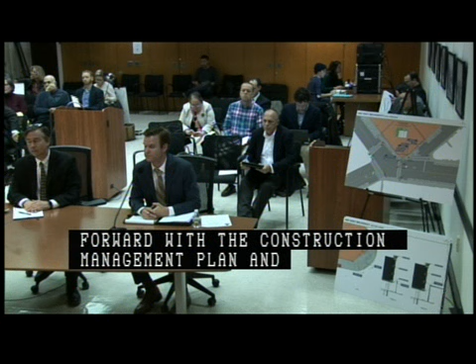If I can, I was present as well, and I would concur.

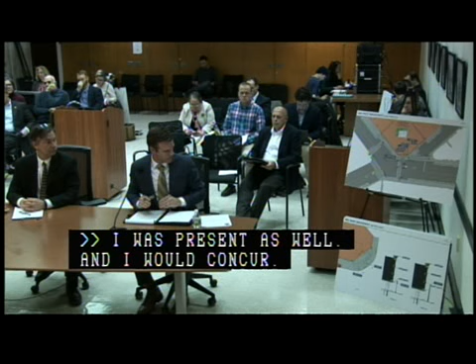You can go through the vertical discontinuances, the first item on the agenda. Yep, so we have the vertical discontinuance is we have a roof cornice, we have the building facade, and we also have some entrance canopy that will be overhanging the property.

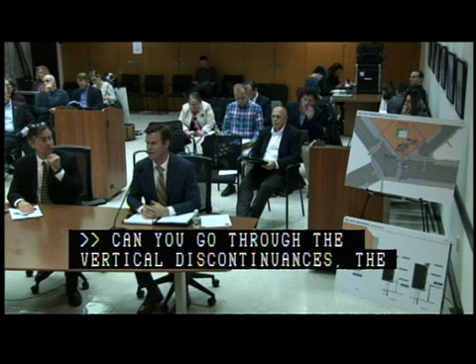The building facade, which I have a section of. So the roof cornice is really what overhangs the property the furthest. The building facade, the concern with that mast arm location, so the surveyed mast arm, we're about 5.5 feet from that pole. And then the entrance canopy at the corner, the furthest extension of the building will be still 5.5 feet from the closest point to the mast arm of the traffic signal. Is that right? Right.

Okay, sorry, keep going. So the roof cornice, that'll wrap around the entire building, but the building facade overhang is really just at the corner where it rounds around, where the property line is more of a tangent.

Sarah, located the pinch point? Because what is not clear is the proximity of the pole, the handicap ramp, and access. So where the building gets that close is not at sidewalk level, it's second floor level. The building starts overhanging, correct, yeah. So the entrance is set much further back, actually behind the property line.

This plan view here, so here's the building at the ground level. On that plan, where is the traffic signal mast arm? The traffic signal is right here. And your ramps are? The ramp is at the transition point of the ramp. So you have to put a pole.

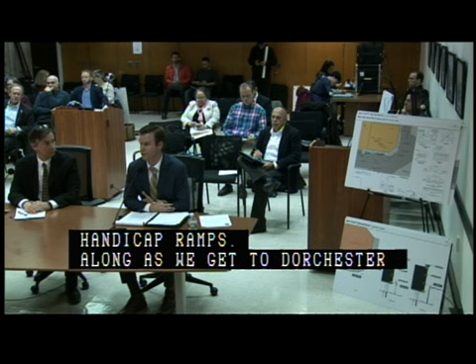So for the specific repairs, we're proposing to reconstruct the sidewalks around the perimeter of the property, the development. Starting on West Broadway, we'll have 2 proposed trees within some pervious paving. We'll have reconstructing 2 handicap ramps, and also as we get to Dorchester Street, we'll be modifying the existing curb cut to align with the garage entry of the new building.

I'm sure this came up in the conversation with BTD, but can you just walk us through how you envision the driveway operation working and how that will conflict with moves on Dorchester Street?

I'll let Guy Busa talk. Guy Busa, Howard Stein Hudson. Now, I was not at that particular meeting, but Doug and Jay can correct me if I'm wrong, but that driveway is serving 21 parking spaces. It's an alternating flow driveway. Because it's residential, it's very limited traffic. So what was discussed at the meeting with BTD was some modifications to some curb use, in particular a parking spot that's towards the intersection from the site.

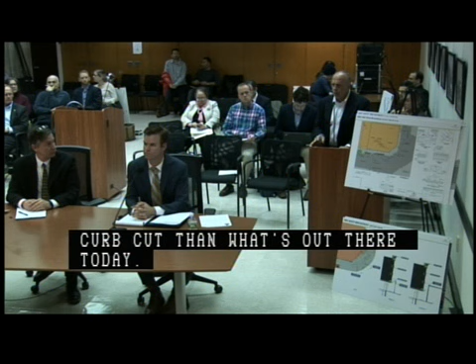And possibly some other changes along Dorchester Street to improve operations, particularly in the PM peak hour. Better than what's today, actually. That driveway is also a smaller curb cut than what's out there today. I believe there are 6 parking spaces, is that correct? On a 24-foot, 22-foot curb cut.

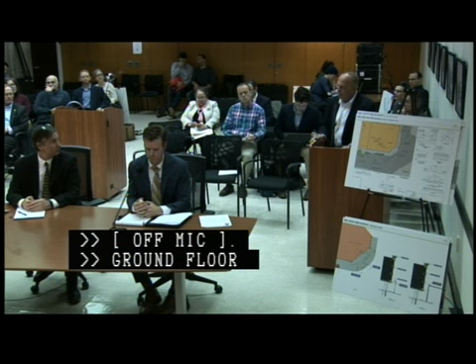BTD was comfortable with this solution. So the intent is to continue working with BTD to refine that plan? Yes, correct. So any changes in curb use will end up with a signing and marking plan for that purpose. Where's the loading for the ground floor retail? Ground floor retail on this type of property would be curbside, as they are along West Broadway. There's no proposed loading zone for this property. It's a small project review. That was also discussed at the BTD meeting.

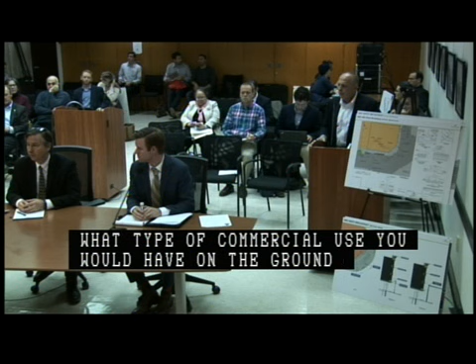Amy, do you have some idea as to what type of commercial use you will have on the ground floor? The use is not determined, but it's not proposed to be a restaurant. Anything that would require short-term drop-off and pick-up, whether it's a bank teller? We have no indication of retail yet. It's one generic space that could be broken up, but it's geared for retail.

We do find that local retail, which is what this is intended for, doesn't get large deliveries. It's much more of a package delivery service, like UPS, and they restock their shelves that way. They don't have any kind of back storage space or warehouse. Like a bank would be perfect. It's fairly typical of local retail.

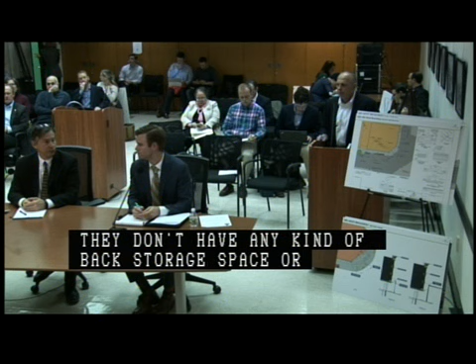I think what we're trying to avoid is a situation where people are just pulling up their cars to run in and clogging up the intersection. So if we envision a use that would dictate that type of behavior, we need to account for how to mitigate that. If that's the case, we could seek some pickup drop-off guidance from the BTD.

Be sensitive, because what Mr. Nelson is saying is, case in point recently at Upham's Corner, there's a Santander bank with a teller machine, and when cars illegally park there, it compounds the traffic circulation, and awkward things happen. We don't want that. This is a problematic Dunkin' Donuts situation. Really, we're trying to avoid repeating that. It will never be as bad as Dunkin' Donuts though.

So, how's that for an answer? Let's set the standards to where we need them to be. Yes, correct, understood. Good point, Amy.

Other questions or comments about the plan? I appreciate the addition of a defined furniture and planting zone with the pervious pavers. Broadway acts as essentially a main street feel for South Boston, and I'd like to see this type of sidewalk treatment proliferated through that main street. It clearly defines the furnishing planter zone, gives us pervious stormwater treatment, and promotes the street trees. Using this corner as a high visual impact anchor is greatly appreciated. Thank you for being responsive to that comment.

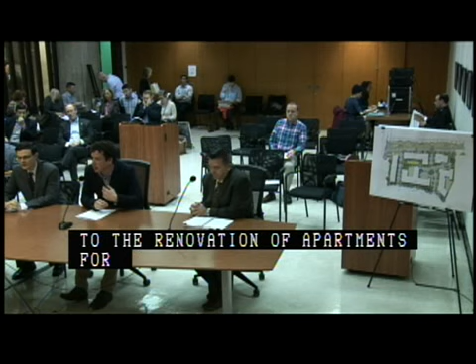The project is part of a larger master plan, of which this is the first phase. We expect to start construction before the end of this year, specifically involving renovating and improving the sidewalk in front of the existing Amory Street Apartments building. The other changes that go along with this master plan will come before the commission as part of a separate petition, and we'll be happy to talk about those in more detail then. It shouldn't affect anything regarding the approvals for this piece.

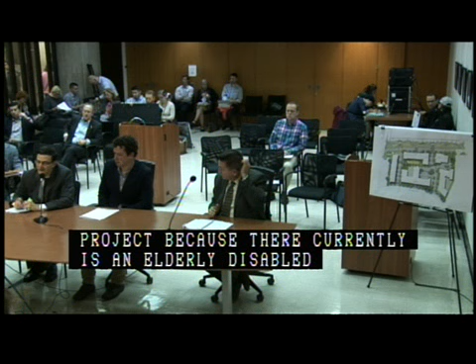I'm Dean Papadimitriou, counsel for the Boston Housing Authority, and we're very excited about this project because there currently is an elderly disabled building on the property that is in need of major renovations, and this is a way that we're going to be able to do that and maintain the existing units, but also add a few additional units as part of the project.

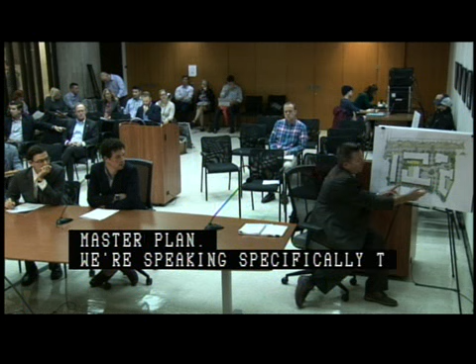Good morning, John Schmidt with Nitsch Engineering. The plan before you is the master plan, and we're speaking specifically to 125 Amory Street and the sidewalk in this area. These future private ways, as we had indicated, will be coming before you in early 2019.

Regarding the easement petition, it runs from the parcel line here to the parcel line here. It's a 5-foot wide easement, and this easement will allow for an 8-foot wide concrete accessible sidewalk, as well as a 6-foot wide pervious paver strip for a furnishing zone.

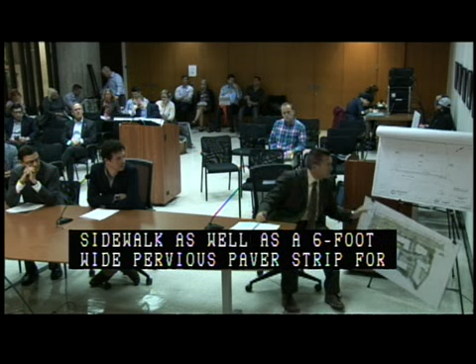It is great. We are appreciative of the fact that you are widening the sidewalk because Amory Street is challenged as it is. Are you going to carry that same vocabulary? Yes. When we come back, we're going to bring this to the limits of our property, and this to the limits of our property. So it'll be one continuous strip.

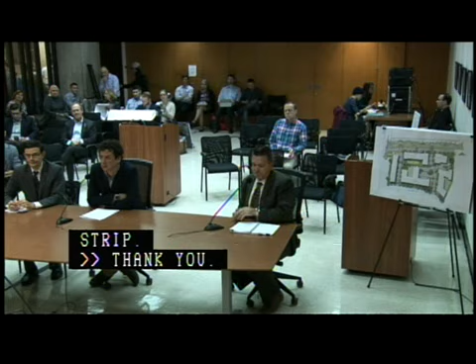Other questions about the pedestrian easement plan? Amy? Todd? Members of the public? All right, I'll entertain a motion on the pedestrian easements.

I'll make a motion to approve a joint petition by New 125 Amory Street LLC and Boston Housing Authority for the acceptance of a pedestrian easement adjacent to Amory Street, as read into the record by the chair and shown on a plan entitled City of Boston Public Works Department, Engineering Division, Pedestrian Easement Plan, Amory Street, Boston, one sheet, dated October 9th, 2018. I'll second the motion. All in favor? Aye. So moved.

Our next item is on a joint petition by New 125 Amory Street LLC and the Boston Housing Authority for the making of specific repairs within Amory Street in Roxbury, located on its northwesterly side at address number 125, generally between Atherton Street and Dimock Street, consisting of curb, sidewalk, and pedestrian ramp reconstruction, as well as new and relocated specialty pavements, street trees, bike racks, street lighting, irrigation, and storm drain infrastructure. This was new business on October 18th, 2018, shown on a set of plans entitled City of Boston Public Works Department, Engineering Division, Specific Repairs Plan, 125 Amory Street, Public Way, Jamaica Plain, 3 sheets dated October 2018.

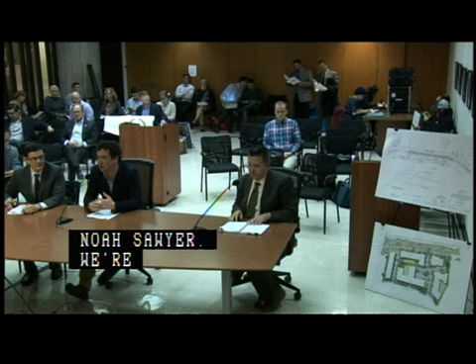Members of the Commission, Noah Sawyer with Community Builders. We are the developer for New 125 Amory Street and are putting this plan forth to improve the front of this building and improve accessibility for the residents. Dean Papadimitriou, counsel to the Boston Housing Authority, and we are also in support of this. We're a petitioner and obviously in support of the petition.

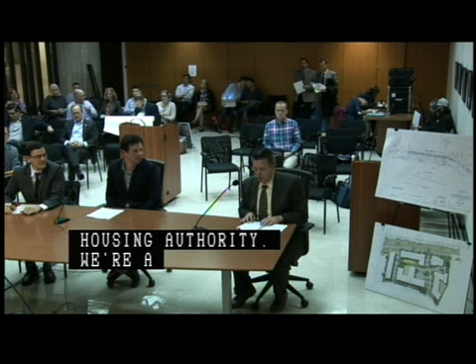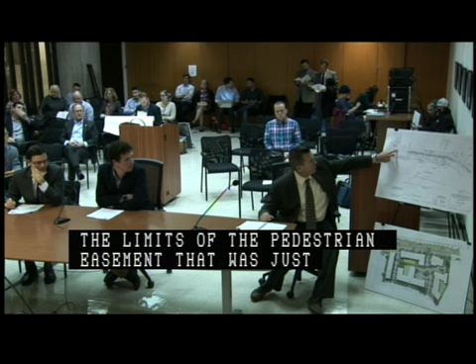John Schmidt with Nitsch Engineering. This specific repair is within the limits of the pedestrian easement that was just approved. As we indicated previously, when we come back in the future, we will extend the pedestrian easement as well as the sidewalk design to the limits of the project's property. We are proposing a 6-foot wide pervious furnishing zone, which will include bike racks, 5 new street trees, maintaining 2 existing trees, and 4 new street lights. Beyond the 6-foot pervious pavers, we will have an 8-foot wide concrete sidewalk. We are maintaining a drop-off area for the residents, and bringing the sidewalk, which is very old, up to code.

Dean, sorry, I was unable to give these comments when you came under new business. I don't know whether there are any bus lines on Amory Street, so I don't know the answer to that question. Assuming there's a bus line, I don't know where the closest bus stop is. If there is a bus stop within the footprint of your project, we appreciate the fact that you are widening the sidewalks. Considering this is elderly housing, it will be nice if the sidewalk or your easement is wide enough that we, the city, can work with the MBTA to put a bus shelter to further enhance the experience of those you are trying to serve.

So, John, I know this is late in the game. Can you please think through what I'm basically asking — is there a stop over here? And if, for some reason, there is one somewhere within this zone — earlier we were unable to do anything towards bus shelters simply because of the sidewalk width on Amory Street — we'll explore the opportunity for a bus stop shelter, and if it applies, when we come back in January, we'll address it at that point.

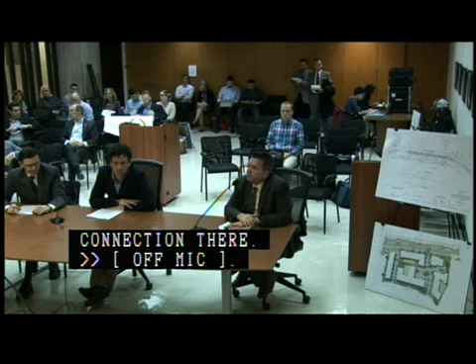Can you talk about the irrigation infrastructure associated with the street trees? Sure, there are hydrants within this, and the street trees are irrigated, fed from the building. There'll be a backwater valve and all the appropriate requirements. And there's an LMA for that? The LMA is being worked out with the legal op. Are you still in site plan or are you approved? We are approved.

Other questions or comments on the specific repair plan? Amy? Todd? Members of the public? All right, I'll entertain a motion on the specific repair plan.

I'll make a motion to approve a joint petition by New 125 Amory Street LLC and the Boston Housing Authority for the making of specific repairs within Amory Street, as read into the record by the chair and shown on a set of plans entitled City of Boston Public Works Department Engineering Division Specific Repairs Plan, 125 Amory Street, Public Way, Jamaica Plain, 3 sheets dated October 2018. I'll second that. All in favor? Aye. Thank you. Thank you.

Moving on to new business, our first item is 1000 Boylston Street, Cambria Street, Dalton Street, Scotia Street, St. Cecilia Street, Back Bay. Discontinuances and an earth retention license on a set of joint petitions by 1000 Boylston Street Owner LLC, the Prudential Insurance Company of America, the Massachusetts Department of Transportation, and the Boston Planning and Development Agency.

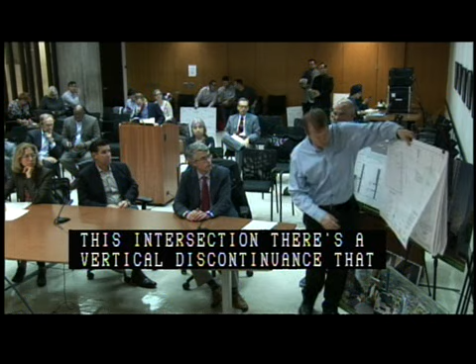Might want to have some plans. At this intersection there's a vertical discontinuance that we're requesting for the canopy extension across the property line, as well as these fins that are part of the design of the building to mitigate solar reflections. So this is the request in 3 dimensions, and that's the plan.

So when we met initially, you gave me assurances that your work will not impact our ability to build the bridge. So I'm saying this for the first time, and I need to give it the consideration it needs, because when we take that spot off the sidewalk, I don't have vertical access.

The mitigation was brought up during the Article 80 process, so it wasn't something we incorporated into the project originally. It was something that came up from a mitigation perspective, and that fin is currently over about a foot.

Yeah, over -- it's not a fin. That 1 foot is not going to make or break our ability. It is this, the canopy. Canopy is about 30 feet above grade along Dalton Street.

And how far does it project, Mark? 6 feet, over the full length of the sidewalk. Okay, so that could be -- not could, may be -- a situation.

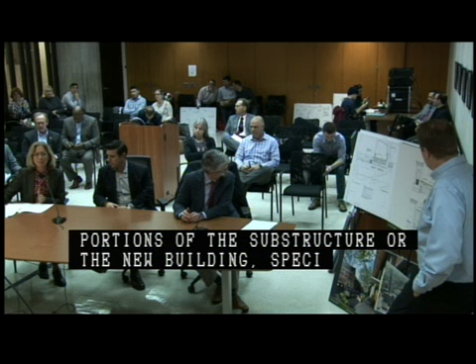On two sides of the site, Dalton Street and Boylston Street, those discontinuances are at or below turnpike level, because the grade there is turnpike grade where the foundations will be installed. So there's no impact to the bridges from those discontinuances.

Excuse me, Maria, so you say it is at the turnpike surface level? Yes, correct. Okay, so the bridge abutment walls go below the surface level. Correct -- these are outside the limits of the bridge abutment. And they're small little protrusions of the end of a pile cap that just happen to fall underneath the bridge line.

Do you mind walking us through, particularly on the Dalton Street side, where? Here, there's a triangle here, which is tiny -- 2 feet by 31 hundredths of a foot -- and that's the one that is.

Because you have not overlaid my bridge abutment walls over there for me to make a constructive comment in this forum. It is not shown on the discontinuance drawing. Okay, so therefore I cannot talk intelligently or even sub-intelligently on that front.

Okay, so it is a concern. Okay.

On the board below, what is the diagonal red line there? Are those tiebacks? That's an architectural drawing along Cambria Street. To the left is the Scotia parcel, and it's intended to show the range and depth of the substructure along Cambria Street, because Cambria Street starts high and then goes down to the loading dock at Hynes Auditorium, so the grade changes.

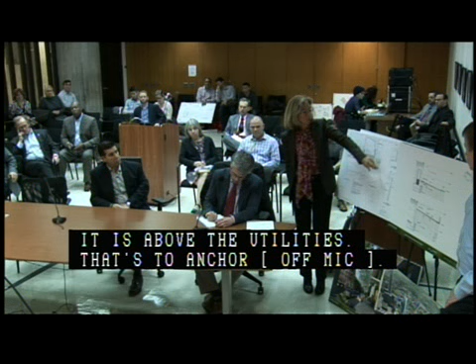Across the street. So you're going to span Cambria Street with some sort of foundation control device, tie rod, tie back. In the earth retention license, there's a tie rod below the street level that extends from the top of the earth retention on the north side of the street to the top of the earth retention on the south side of the street for the adjacent parcel. It's up high, above the tops of the utilities. That's to anchor the earth retention along this side, where the street grade is high and the cut is deeper. It's shown on the sections for the earth retention license along the street.

I'll study that a little more, and I might give comments on inspection, because at the moment I can't remember if we're just relaying that sewer. We are relaying the sewer within the proposed building limit, so it would be new there, and then a little rehab a little further down. New sewer line and a new drain.

So does that happen before the construction excavation? Are these new assets going to be in the ground when you start doing foundation work? The answer is yes, we plan to do that first. Utility work first, then foundation work? Absolutely. So you're going to need to ensure those brand new utilities are protected and that we don't put a tie rod through the middle of the sewer.

The enabling work includes investigations to locate as-built locations of the utilities in Cambria Street and relocate as needed so that they're not impacted by the construction. We will need post-construction inspection to make sure all the assets are not damaged. The intention is to coordinate with all the utilities when that work is underway.

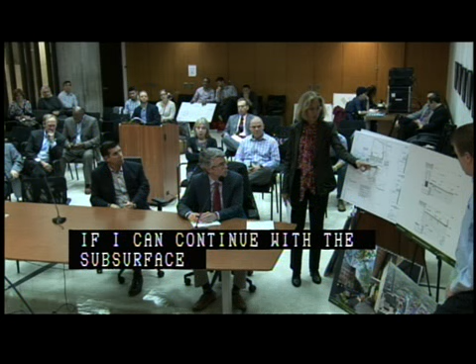If I can continue with the subsurface discontinuances along Cambria Street, there is a discontinuance shown on your drawings all along this existing retaining wall that separates Cambria Street from the railroad tracks. There are portions of the substructure that will protrude into the public way. They're shown in sections on your drawings, and they will be 6 feet below grade. So it's pretty much along the whole length of that street.

Where on the other streets there are these very small little protrusions that Public Works wants more information on the bridges, this extends all along Cambria Street. This is the street here, and this is the portion of the substructure that protrudes beyond the property line. That's the wall between the street and the railroad.

And what is the protrusion? Is it just like a concrete footing? It's a pile cap. That whole wall, the earth retention is installed to allow the demolition and removal of that wall so that new foundations can be installed. They can come back up and build a new pile cap and a new retaining wall. So there's quite a bit of work that goes along here to restore that retaining wall and allow the new foundations to support the construction above.

Okay, and where does that fall in relation to the final condition of the sidewalk on that side of Cambria Street? As the street slopes, which is shown on this section, it's dropping as you move towards the east. The top of the substructure is maintained at 6 feet or greater below the street level. But does it align with the sidewalk on Cambria Street closest to Boylston Street? It's just behind the curb.

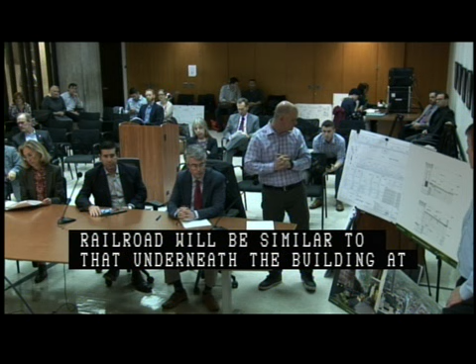Other components of the plan you want to walk us through?

Sorry, in the BPDA's process, how does this go? So this is - they're here. So we'll be taking the parts owned by the city on November 15th.

Okay, so time out. We need to discuss the envelope of the discontinuances before you take it. Okay, because I don't know whether we, Public Works, can have enough time to review everything. So, Chairman, just make sure that we've done our review before you all take a vote.

To be really positive - sorry? Yes, because they're going to the BPDA board on the 15th, but this will not come back to us until December 6th. Here's the thing, Amy, if they vote - yeah, no, we're done, that's when we have to vote as well. Correct. So if they vote and we don't, then you have to go back and have BPDA undo the ownership of a random amount of space over Cambria Street.

So Janet, it's going to take us more than a couple of weeks, considering time constraints, to sort everything out before November 15th. That much I can say with fair amount of certainty. So if you can orchestrate things so that it is in the best interest of these nice people, plus retaining the city's ability, so as not to make things awkward for us. So we can talk. Okay.

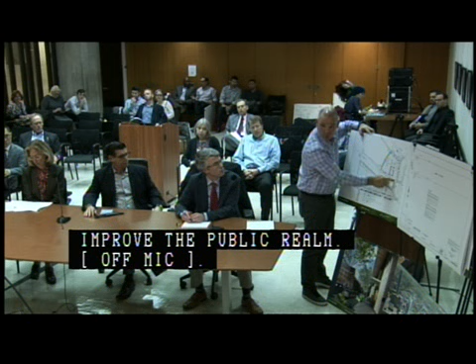That's this zone right here that you see. The property line is sort of a curve that is offset from the curb line, so we've chamfered that corner to accommodate a wider pedestrian realm that can handle these crosswalks coming in from both directions. So it's really accommodating two things: one is improving the pedestrian realm, and two is dealing with a very difficult area of the building where we have these enormous trusses spanning Cambria Street.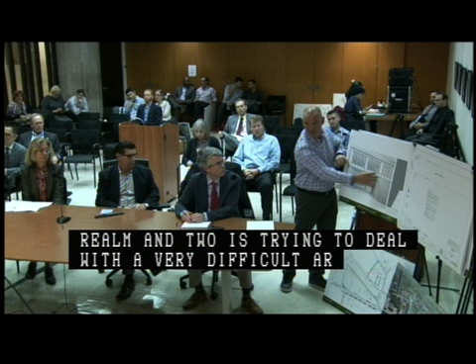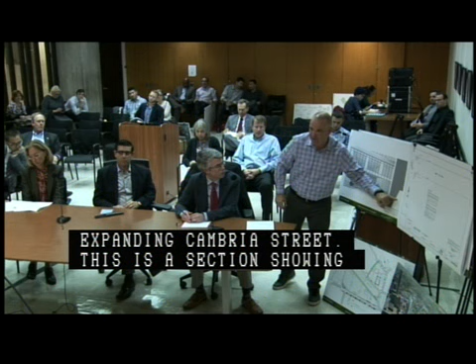This is a section showing the slope of that wall in the pedestrian zone that you're creating there, which is at a 10-foot height, almost 9 feet wide. What's the distance between the base of the wall and where it gets to 10 feet of clearance? Here you've got about 3 to 4 feet, but it's below 10.

Presumably this would be part of the specific repair plan, but obviously you're going to give some thought to how to have the stairwell on the north side hit the sidewalk without confusing every pedestrian coming down Cambria Street. That's part of the design.

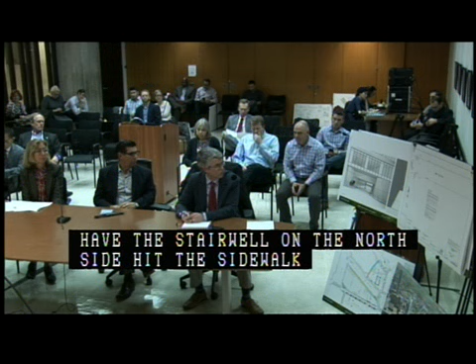Okay, and I guess a little bit more to Par's point about how is that going to be lit? So we have lighting on this facade here. This piece gets to glow a little bit, just like a layer of lighting. And then you can see here we have the pole, the single acorns that are lining both sides of the street.

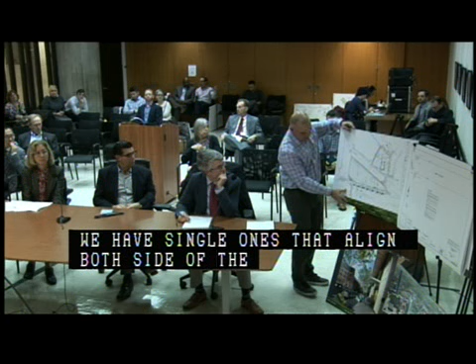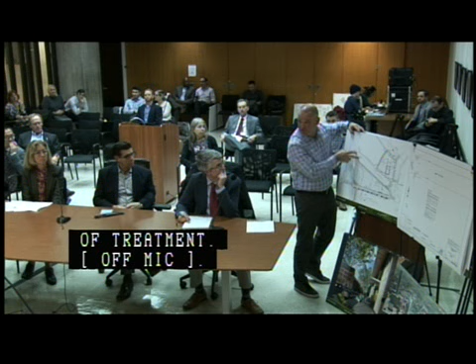So we're giving it the same kind of treatment as you would typically give a city street. You see those pole lights show up here on a regular pattern. These four happen beneath the building, so you're treating it like it's a city street that's just traversing that area.

We also have accommodated some bicycle parking here with a wider sidewalk, trying to take it out of other areas where there might be increased pedestrian traffic, and then try to really not treat this as a sidewalk for people to actually have to go down, because it really doesn't lead anywhere.

Yeah, I understand. I want to make sure that little angled wall and that alcove isn't an attractive place to escape the elements and take a nap. So I don't know if there's uplighting or something in there that can make it not an attractive place to hide. Yeah.

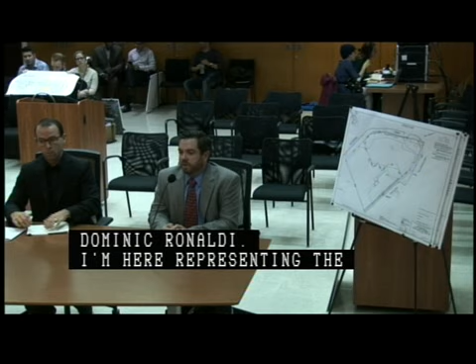Good morning. Dominic Rinaldi with the BSC Group, site engineers and surveyors for the project, representing the applicants 6 West Broadway LLC and CPC Cornerstone LLC. With me is Nick Ruggieri of Rohde Architects. Unfortunately the actual applicant had an emergency and couldn't make it. We're here today with 3 petitions for the commission: widening and relocation, pedestrian easements, and specific repairs, and unless the commission objects, I'll walk through those in that order.

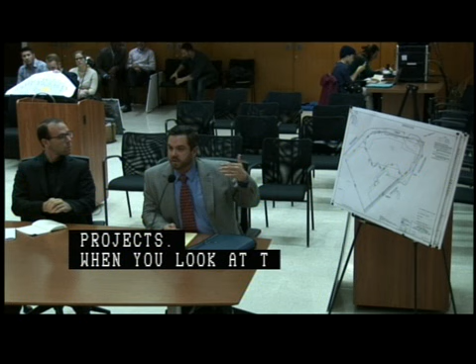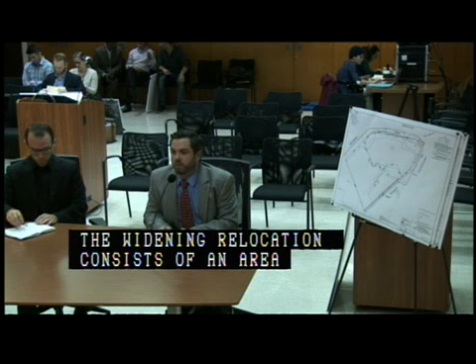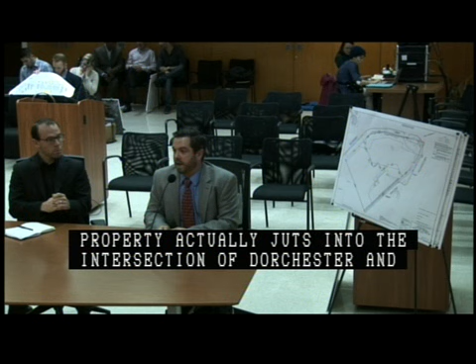First, to orient you with the sites: in South Boston, Dorchester Avenue is at the top, West Broadway to the left, West 2nd Street and Athens Street to the right. The Broadway T station would be roughly where the locus plan is shown. The 6 West Broadway project, a hotel project, is the top half, and 14 West Broadway, a multifamily condominium project, is the bottom half, running from West Broadway to Athens Street. The widening and relocation consists of an area in the northern corner of the 6 West Broadway property, where it juts into the intersection of Dorchester and West 2nd. We're proposing to pull that back on a radius that would bring the entire roadway and sidewalk into the public right-of-way — a cleanup at our request so they stop owning the street. It's quirky; I don't know how the property ended up like that.

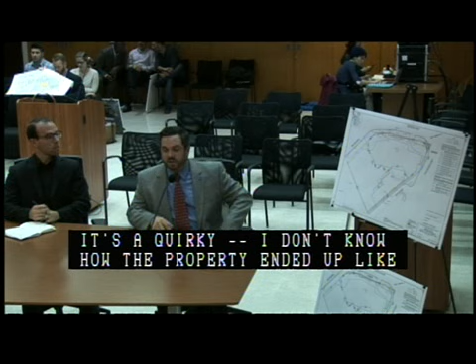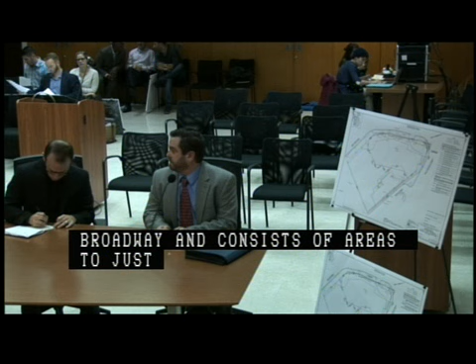Moving on to the pedestrian easements, we have 2: one on Dorchester Avenue and one on Athens Street. The Dorchester Avenue one is associated with 6 West Broadway and consists of areas to create wider sidewalk spaces. It's irregular because it represents the change in material from cement concrete to paver, which is why the line isn't straight.

Is there any other way? I know you're good at making sure there's structured uniformity, so 10 years from now we'll know what was meant — to go out there and know everything that's cement concrete is ours and everything paved is theirs. So this is the outline of the cement concrete? Yes. Is there any way — I assume there's some other material on the opposite side which we don't like? Yes. So we'd rather this be irregular visually. I know, but could you make the boundary a little more defined? I think this will make sense in context with the building, like the paving moving with the building. Do you have an image of what the building will look like with that concrete paver?

If not, we'll bring it to the public hearing so we can make an informed decision. To give you some idea, the first level of the building — this heavy dark line is the first level setback foundation — and upper levels jut out forward, pretty much following the property line. So this is increased space they're going to give us? Yeah, this is going to be the widening of the cement concrete portion of the sidewalk.

Can we live without it? How wide are the sidewalks? No, no, okay — especially on Athens Street, which is very, very narrow. On Athens that's fine; it's just stuff on Dorchester. You have a handicap ramp there. They're actually giving us more room behind that ramp. But why is that ramp there? Is it an ADA ramp, if I parked over there?

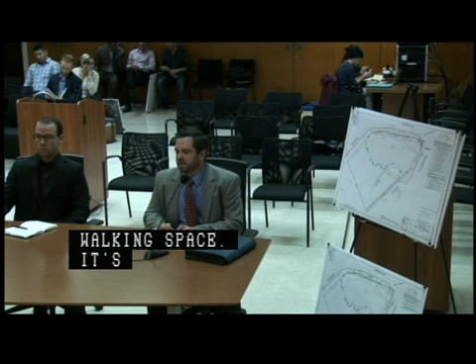And then, as I was saying, on Athens Street, which is a very narrow street, it's a similar thing where portions of the building are set back enough and the property is there to provide a 5-foot clear walking space. It's only about 3 feet in the public right-of-way. That's on Athens, not West Second. That's all good, nice.

On Dorchester, you have what's like a driveway. Is it a driveway going into... no, further up, keep going, that one, that little thing coming off. Is that a driveway up Dot Ave? A porte-cochere? Yeah.

Okay, got it. And you're getting out on... back on Dot Ave, or do you pull out on the west side? West Second? It's on West Second, west side, okay got it. So it goes underneath your building and pops out on the other side? Correct.

Is that like a pickup drop-off for the hotel? Yes, like front check-in. I'm sorry, I missed that. What's the functionality of this building? Number 6, the one up here, will be a hotel. So that's how you would come and circulate. No problem.

And where the building overhangs, what's the lighting situation there? We have the columns that are uplit, as well as probably a few dozen others. So it's almost a triple height space that you pull through, and there's lights washing the wall, as well as the columns, as well as downlights in the ceiling. The lobby itself is glass, so there will be light coming from within the building as well, more light than it has now.

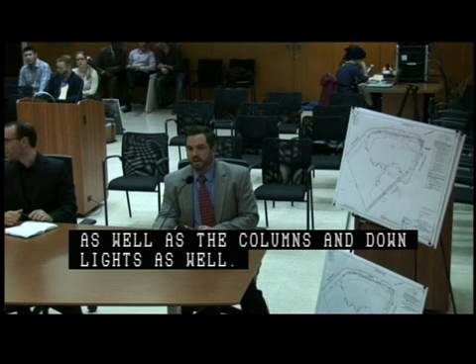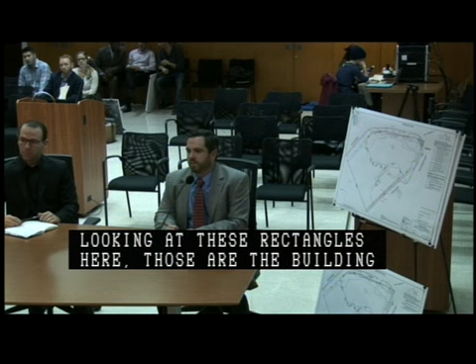For reference, if you're looking, these rectangles here are the building columns. So a variety of nice lit spaces. Excellent. Have you locked in your hotel partner, or is that private knowledge, or can it be shared?

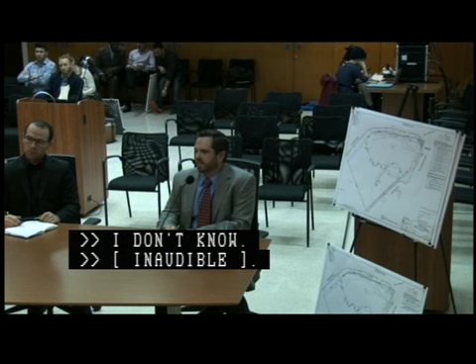I'm okay with any answer, just curious. I don't know, that's actually... I'm just trying to get a sense of whether it's a chain hotel or a local one, because if it's a chain hotel there's higher demand for outside taxis, Ubers and Lyfts, the whole kit and caboodle. So if you don't know, it's okay.

Can you walk us through the widening, relocation, and easements, and also walk us through the specific repairs? Yes.

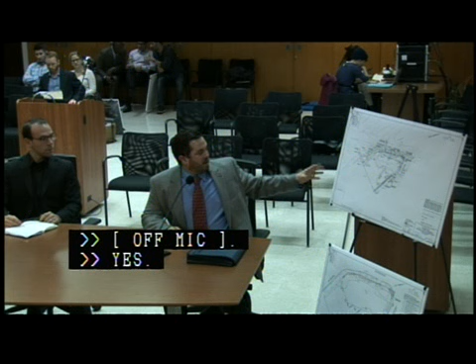So the specific repairs encompass both projects, basically wrapping new sidewalk and curbing around, starting at 14 West Broadway, all the way around Dorchester and that portion of West 2nd and Athens. This also includes, as part of the Article 80 mitigation, a realignment of that very end of Athens Street. The curbing right now comes in at a very severe angle, so that would be squared up with new sidewalks and curbs. We're also maintaining one street tree on West Broadway and installing 3 or 4 new ones.

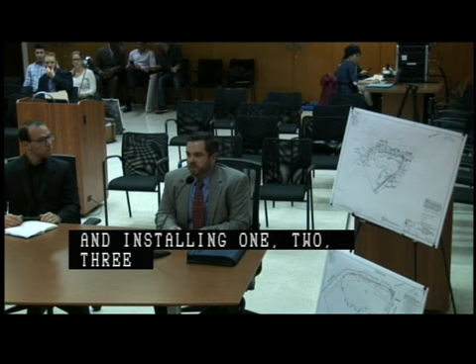The driveways, as you mentioned, both for the hotel and the condominium building, a new accessible curb cut across Dorchester Avenue to the traffic island. We're also going to be fixing the actual curb cut on the traffic island as part of that.

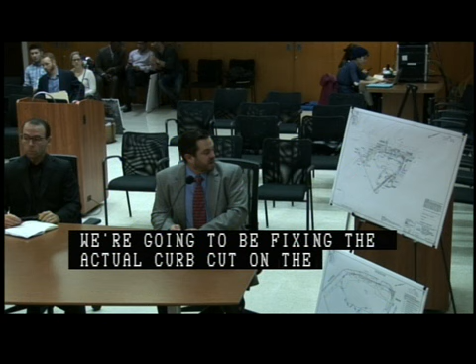And realigning the crosswalk across West Broadway, squaring that up. Previously it went from corner to corner at a very long, sharp, slow angle. As part of that change, the stop line will slide back accordingly.

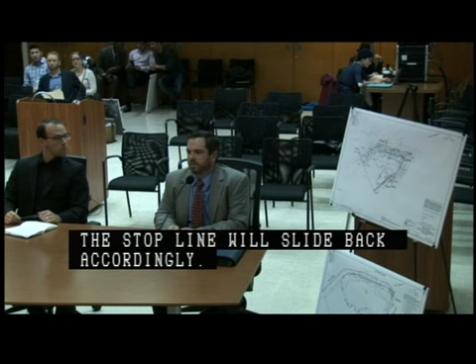Is that crosswalk today controlled by a stop and walk line? It is, and the pedestrian signal will be moved down to the new location. The realignment of the crosswalk has had the blessing of the engineering section of the transportation department.

It was actually part of a TAPA agreement for 6 West Broadway. My only concern is, I know you're doing this to improve safety, but people have a rather interesting way of walking - they're not going to go straight across. So as long as this has been done with the concurrence of those responsible for pedestrian safety, I have nothing further to say, just a concern about taking parts of travel away and not managing the safety appropriately. Correct, yep, as I said, it was part of the TAPA for 6.

Other things you want to point out on this repair plan? Anything else? Trying to remember, I think that's about it. We're maintaining the existing street lighting - that area has somewhat decorative street lights, and they will stay in place.

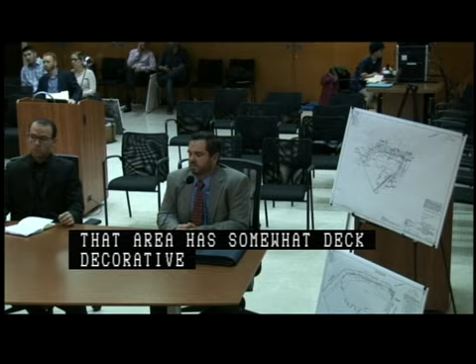Not trying to labor the point, but on West Broadway, when approaching the intersection of West Broadway and Dorchester, have your traffic engineers assess the situation and see whether there should be a no right turn on red. Because a pedestrian crossing at the new crosswalk won't be able to see the car, or when the car makes a right turn, they won't see the pedestrians. So there's going to be a disconnect, and putting in a no right turn on red may complicate the operational efficiency of the traffic signal. These are the little dangling participles you need to assess.

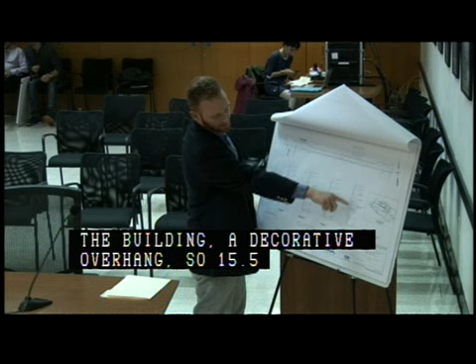So starting with above grade on Guest Street, this is for the building. It comes over - we're asking for 9.5 feet out, up to elevation 118.5, and then there's an overhang on top of the building, a decorative overhang, so that will come out another 6 feet, for 15.5 feet total. At the lowest point on the east side, the discontinuous area is 11 feet above the sidewalk.

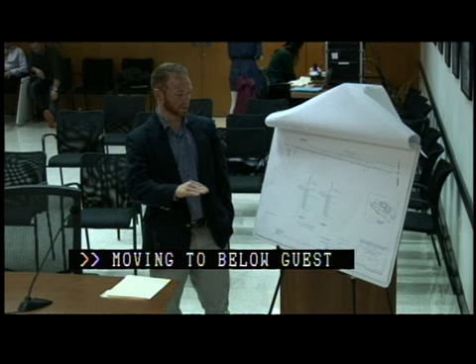Okay, so then moving to below Guest Street, this is for the pressure-injected footings for the building. They'll be about 5 feet below grade. We're asking for 3 feet horizontal and to go down to an elevation of -3. This is for the length of the building on Guest Street.

Amy, again, from BPDA: the urban design vision for Guest Street, because Guest Street is going through a metamorphosis - to reflect comments Mike Nelson mentioned prior today, there's a consistent vocabulary being followed through. Yep, we're actually following this up with Elizabeth Stifel right now. We're going through all this, but yes, we have an okay from them to go ahead and support this.

Okay, moving to Life Street, it's just asking for 2 small discontinuances for signs. The larger sign will say New Balance track - that's for signage, no lighting, just a static sign. One says New Balance track, the other one is parking, and that's the entrance.

And then below grade on Life Street, also for pressure injected footings. In order to minimize the area of discontinuance, they're kind of staggered in elevations. The elevation goes down as you go on Life Street towards Guest Street. It's the same consistency, 5 feet below grade is going to be discontinued, and they're all down to an elevation of -3, but we staggered it instead of doing a straight elevation.

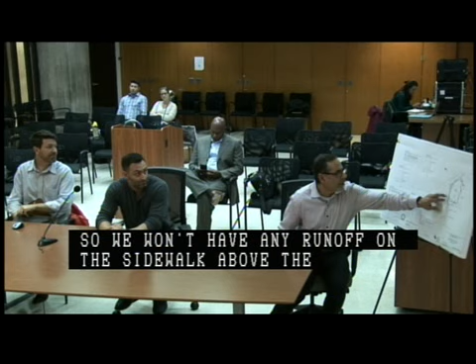Yeah, we're planning 3 vertical discontinuances above the sidewalk. All are above 10 feet above the sidewalk, and all the water from the drip edge will be drained internally into the drainage system of the building, so we won't have any runoff onto the sidewalk above the 3 areas. So we have this area, and this area, and here's the elevations of the 3 areas: 1, 2, and 3.

So, if you could, in as few words as possible, just give us an overview of your project. This is a new construction, rehabilitation of existing building - how many units? The architect can tell you about the building better than I can. Sure, yes, it's 4 new units, completely new construction.

Is it a vacant property? It's vacant property, currently 100% impervious parking lot. Are you in the site plan process with BWSC? Do you have an approved site plan, or are you still in process? We have an approved site plan.

And they're basically all at just a shade over 10 feet. Correct, and we've undergone GCOD, we're done with that process and approved. Yes, it was an as-of-right project. It was a conditional use just for the GCOD. Okay, yeah, I just was wondering what the status of the site plan was.

And the section C discontinuance seems to extend roughly 2/3 across the sidewalk, is that right? The upper left one will be about 2/3 above the sidewalk, and then the other 2 about halfway, and about 20% on the one on Endicott. Is that... do we have a... 2/3 is our cutoff.

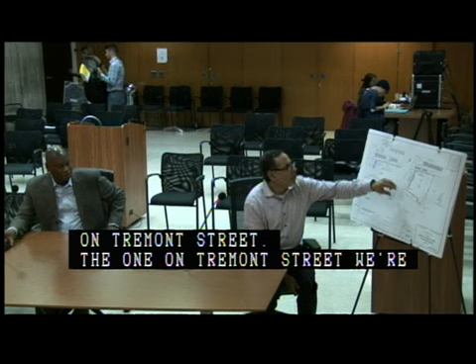Good morning. You want to tell us a little bit about the project, and then we can walk you through. I'll start, George Collins, I'm Daryl Settles, I'm the owner. We're proposing 2 sidewalk cafes. One is solely on private property, and the other is on Tremont Street. The one on Tremont Street we're seeking relief for today consists of 28 seats, 2 of which are handicapped. The main entrance to the restaurant is right here, so we'd be walking through the middle of the cafe to the entrance. They'd come in, and then we'd be seated this way by the 36-inch accessible route.

We have 7.5 feet minimum to where the sidewalk turns into brick pavers. So that's our handicap access for the current sidewalk. It's a very wide sidewalk, but we're showing the 7.5 because that's between concrete and brick pavers there. So it seems like plenty of room to get by for pedestrians walking in that area.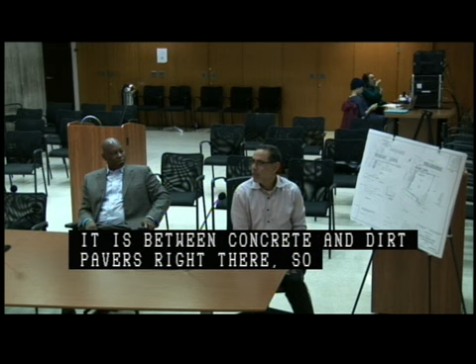This is Slade's Bar and Grill. Yes, got it, awesome place. Thank you. This is going to be our largest sidewalk cafe by seats - this would be our largest sidewalk cafe, or one of the largest sidewalk cafes in the city.

Well, the sidewalk is huge. It's huge. Yeah, I mean, it's like the largest sidewalk in the south end, I believe. It looks like an appropriate place for a sidewalk. We're very approving.

It's 23 feet. What's with the bollards in the sidewalk there? Do we have a problem because it's so big, people were using it as a street, people driving cars on it? I'm looking at that street, it was done before my time. Are they still there? Yeah, they're still there. Just asking.

And so the resulting sidewalk is still 7.5, 8 feet. Right, we have plenty of room. And the seating on the Hammond Street side, that's all part of your property already? That's correct.

Thank you. Other questions or comments? This would be a good addition, I like it. Maybe you're done? Great, thank you. All right, thank you so much, appreciate it.